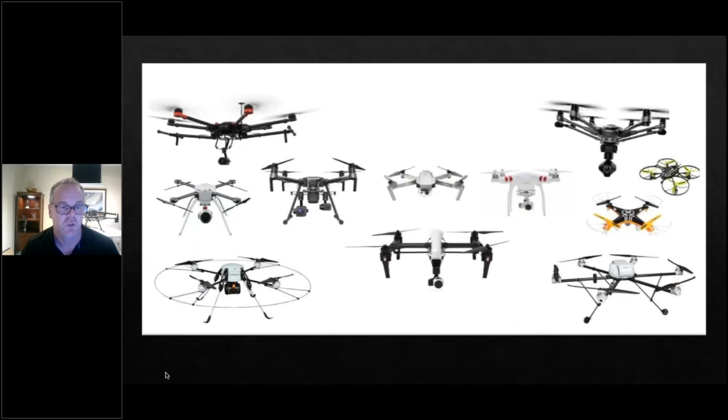So Colin's going to talk a little bit about some of the Transport Canada regulations.

Thanks, Andy. Yeah, before we get into the fun stuff, the equipment, and getting into the fun things we can do with that, I think it's very important for people to understand that Transport Canada plays a big role in what we can do, obviously in Canada. Lots of times people think, well, I can go get this toy for my kids, go to Canadian Tire and buy them a drone and they can fly in the backyard.

Unfortunately, probably back in 2016, 2015, that was the norm. It was pretty much the Wild West out there. Since then, Transport Canada has done a lot of work, a heck of a lot of work actually, to get themselves caught up from the regular traditional aircraft world to bring their minds down to these small little machines that can definitely impact a person if they happen to come in contact with somebody, and also a traditional aircraft should you happen to have a collision with an aircraft. So over the last few years, they've been developing a regulatory structure, which is still again in development, but now there is a set of rules that people have to abide by when they go and get a drone from Canadian Tire, from Best Buy, or whichever.

So just so people are aware, anything over 250 grams in Canada is a regulated piece of equipment. So you can have either one of two licenses from Transport Canada, a basic or an advanced operator certificate, and that gives you certain capabilities in different kinds of airspace you can go and fly your drone.

The other important thing to note is that Transport Canada really recognizes the fact that first responders have a need. Probably, I guess it's very easy to separate that need from your commercial operator from your consumer operator, and they really recognize that from the very beginning. So they've been working directly with some first responder agencies just to determine exactly what those capabilities are and give us the ability to basically get to a scene, not have to make a bunch of notifications, do a quick site assessment, and launch our equipment. So we have to give them a lot of credit for the work that they've done over the last number of years.

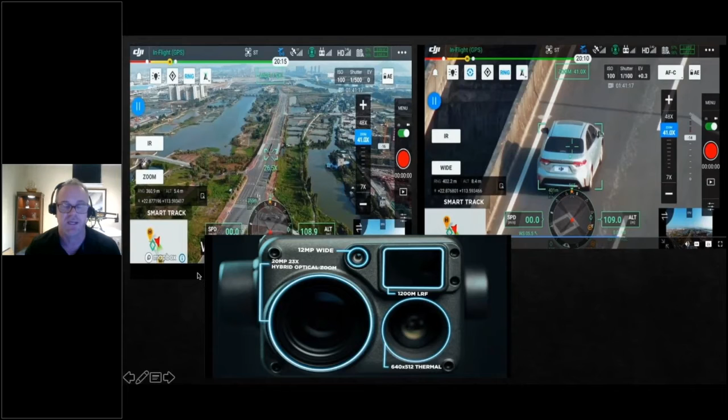So in this example, you see at the top there's a 12 megapixel wide view camera, 23-time optical zoom, which combined with the digital zoom gives you a magnification of close to 200, and then the high-end 640 by 512 thermal. What that lets you do is, in this case, the picture on the left would be the wide angle view, which gives you a good situational awareness overview. A quick push of the button, and you're on the zoom.

The other advantage these systems have now is target tracking. Push of a button, and you indicate the target you want to follow, and it'll follow that target. That technology's been around for a few years, but it wasn't always that good. Like a lot of things, the systems learn, the demand is there, and these systems are really good now. We did some tests where I went behind a building and the camera would follow me. Older systems, it would lose you. Now it's almost like it waits and anticipates that I'm going to come out on the other side, and it'll pick up that target again.

So much improved. Other things it has are the laser rangefinder. You can see here from the system to the target is 402 meters, and it'll also give you a lat and long position.

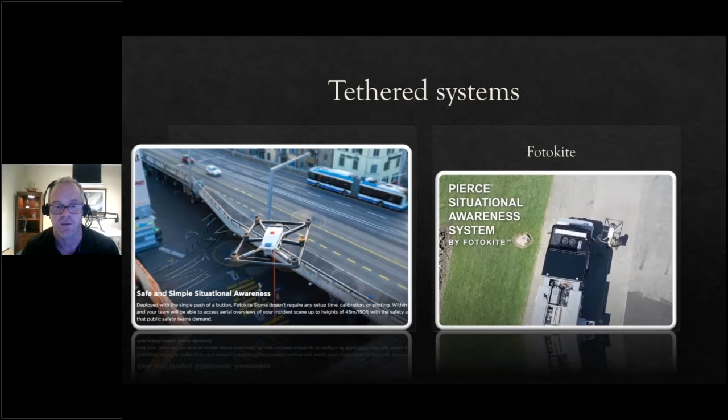Just another example of the tethered system. It's portable—you can carry it in a rolling case or mount it on a vehicle. In this case, it's mounted on top of a fire truck. It could be a command post. That gives you an idea of how this technology is progressing.

So, watching our time here, we're going to talk about standardized training. One of the big challenges of standardized training is, number one, to have a program that's recognized.

In my previous world, we started working with this group a few years ago on the bomb side, bomb robots. ASTM is a widely recognized global standard in a lot of things, not just robotics—it's a standard for a wide range. NIST is a division of the US Department of Commerce, and they're the group we started working with. They've developed a methodology that we're looking at to adopt in the robotic field.

So the purpose of the project, covering ground, air, and water, is basically to develop a way to evaluate not just the systems themselves—because there's so many with different capabilities—but also to evaluate the pilots, the operators, and to be able to collect that information and use it effectively.

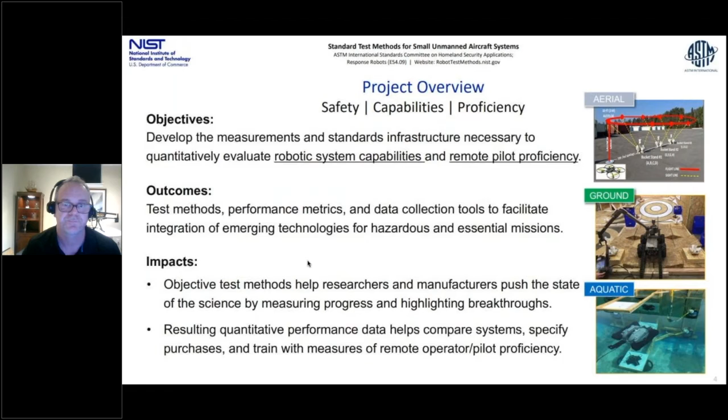You have to be able to measure capabilities. There's an enormous range of robots and capabilities out there, so you have to know a department's not going to be able to buy one drone that does everything. It might be too small for certain applications, or too big—you can't take the M300 and fly it through a house. It's just not going to work. So you have to understand what you're doing.

Inspire innovation. If there's something you need and you need to communicate it to a manufacturer or a representative, you can use these tests to explain what it is you need. A guide to purchasing and deployment.

There's lots of examples out there—I know in my department and others of equipment that was purchased and never used because it didn't ultimately fit the role it was designed or purchased for. So you want to be able to make a purchase knowing what you need it for. If you're shopping for a car and need to carry a lot of stuff, you're probably not going to buy a four-door sedan—you want something suitable, like a pickup truck or a van. So this gives the purchaser that information.

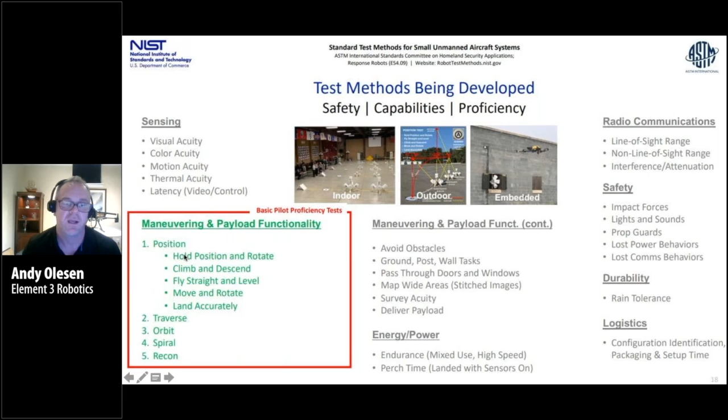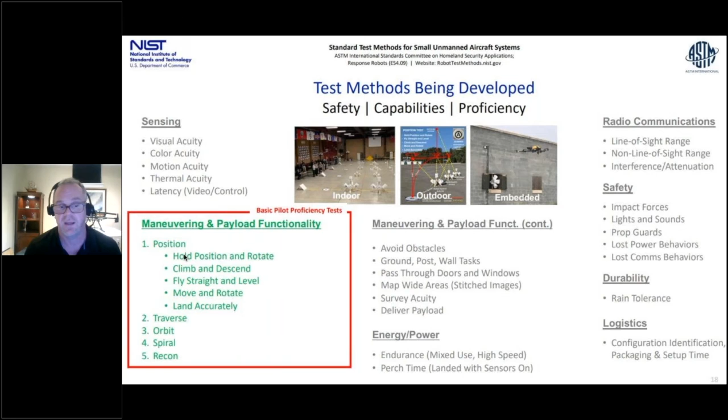The red box is basically what was identified as the basic core skills—what an operator needs at a basic level to ensure they're competent. That would be just the basic flight maneuvers: being able to hold a position and rotate the system, climbing and descending, flying straight and level, moving and rotating, and landing accurately. Those are the core ones.

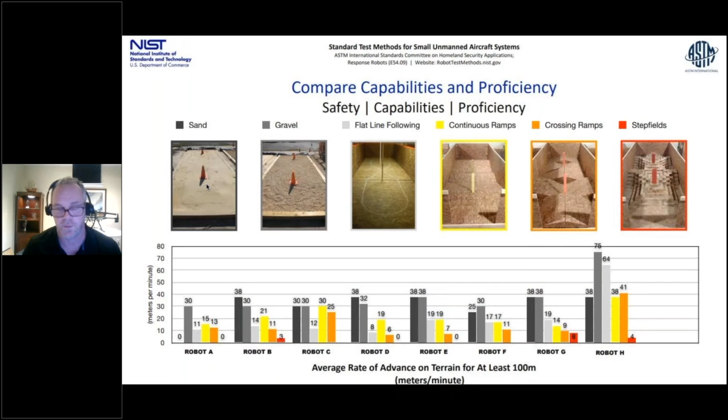That's a specific system and how it did on a specific standard test. If you needed a ground robot really good in sand, you probably wouldn't go with robot A because it didn't do well. At least it gives you that information. Robot H on the far side did pretty well in sand, and those metrics and indicators are there for each test. This applies equally for aerial systems. All the aerial systems designed have certain applications, and it allows the operator or purchaser to make an informed decision.

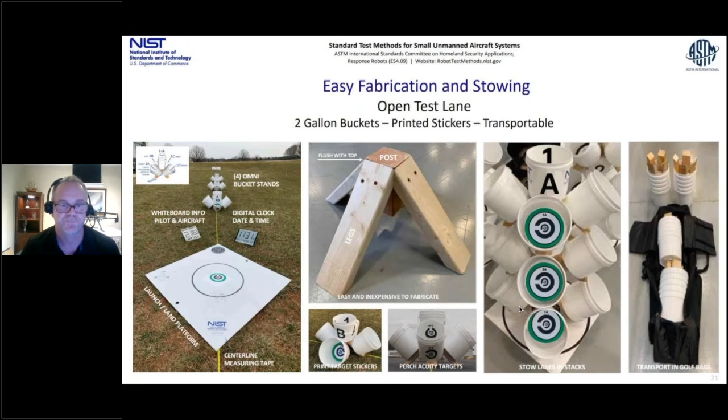The stickers have two basic functions. Down at the bottom, they're put in buckets so the operator has to be in a certain position. If you're too far left or right or up and down, you're not going to see the target, so it focuses on the task at hand. The operator would fly the drone over a bucket, and their purpose would be to see that green circle. If they see an entire green circle, they're in the right position. If they don't, they wouldn't get the point or the mark.

On the right is the payload functionality, designed to test the camera abilities. Some smaller systems have great cameras, but you need to know how close you're going to get. These are called the Landolt, the concentric Cs, Landolt test method. What the operator looks for is where the gap in the C is. On the large one, which most systems can see relatively easy, the gap would be on the left. The next one in would be bottom left, and there are actually five circles in there.

How this translates to emergency services is, if you were a police operator looking for a license plate, the second ring in there, if you can see that, then you can see a license plate, which on a lot of smaller systems means you're probably about 10 to 15 feet away. On the smaller system, if you're 30 feet away, you're probably not going to be able to read a license plate, so you know you have to get in closer. If you have a big zoom camera, you could probably be 400 or 500 meters away, because you have the zoom you can see the camera. So it gives you an idea of the capabilities, strengths and weaknesses of your system.

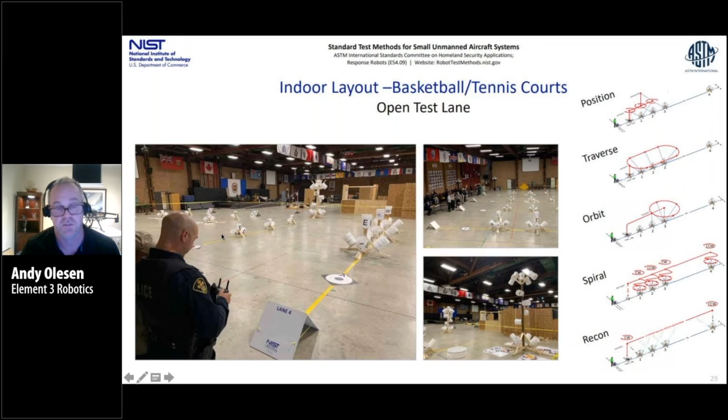These were some tests we did at the Ontario Police College a year ago. We ran those basic lanes, five of them I think, and ran the operators through it. The examples in the back are the ground, the bomb robot test, that wasn't part of the aerials. But this gives you an idea of five lanes in a relatively small area.

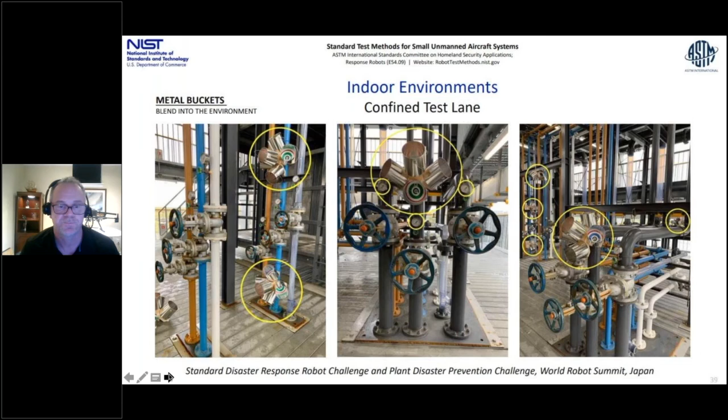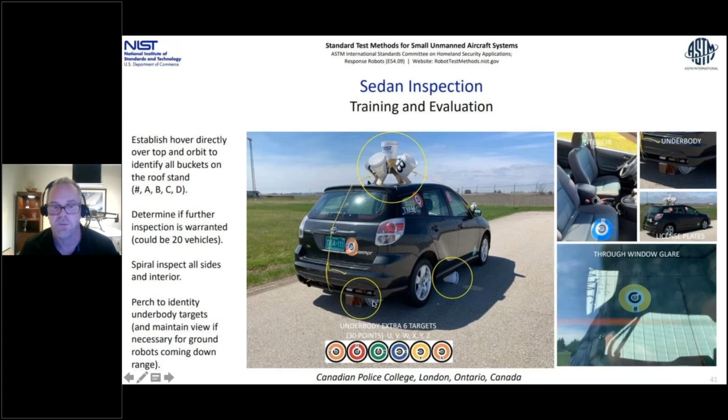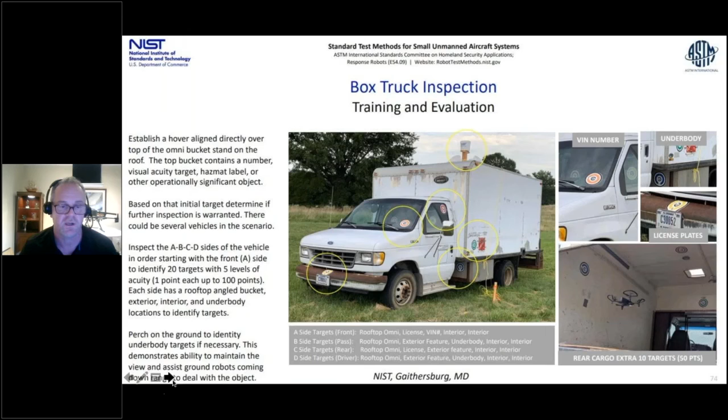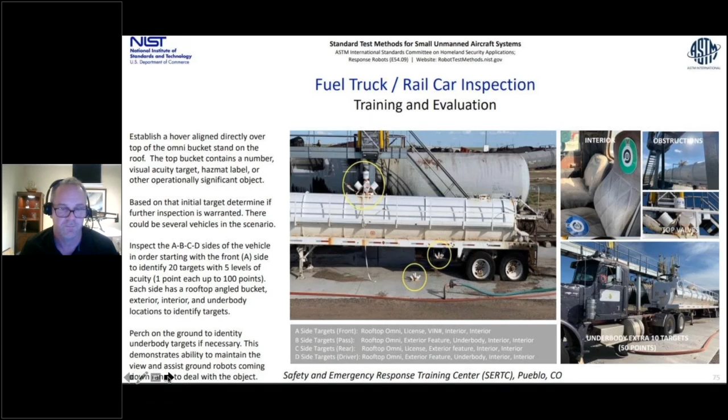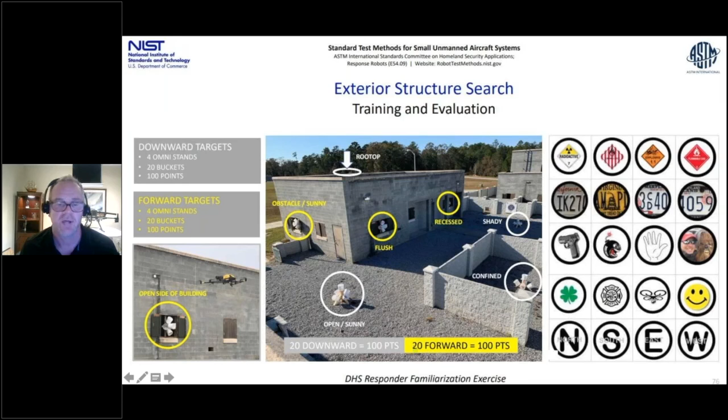Any kind of standardized testing has to be varied enough to apply in different situations. These kind of test methods are primarily used in the daytime. For night operations, you can either illuminate the same targets by external lights. You can put headlamps in them to light them up, or leave them dark.

BVLOS is beyond visual line of sight. Right now, everything has to be done where you have to be able to see the system, and you have to stay under 400 feet. If an emergency service operator flies behind a building that's just a few feet away and loses sight, technically that's against the rules. Transport Canada knows that's an issue. Those rules are probably going to change, but how do you evaluate the systems that can do that? How do you train the operators to be able to do that in a standardized fashion? And that's how we see this being a benefit.

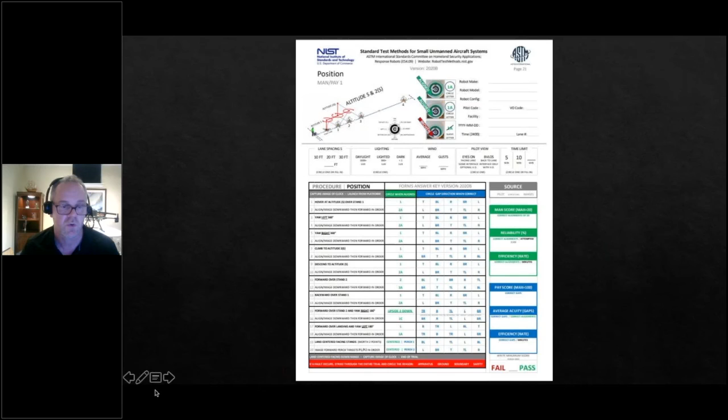This is my last slide, and I'll turn it over to Colin again quick.

Most of the police operators are part-time, they do other jobs and then they do their bomb job, so they don't get as much time. So you'd think that without enough time, their scores would be a little bit less.

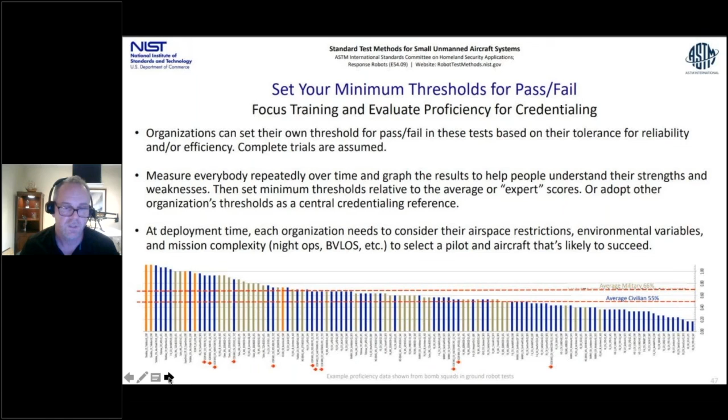So I'm going to turn it over to Colin to talk about the new SARA Association. Thanks, Andy. This will be our last slide, everybody, just so you know.

Just briefly want to touch on this new Canadian First Responders Robotics Association. As I mentioned earlier, one of the things we run into is a lack of standardization, nationally and internationally, but we're going to cover Canada. So we developed this new association to work in concert with the regulators and with a number of agencies in Canada to develop a standard. Based on these NIST standards that Andy just talked about, we'll have recommendations come out from the association for people operating in the drone space, so that we're all on the same page essentially. There'll be certain benefits for operators once they get the training, they get up to speed, and they'll realize that by operating in concert, we're all moving the industry further together, as opposed to all doing a number of different siloed attempts at developing our drone program.

So I want to thank everybody for their time and their patience. That's all we have for today. I'll turn it back over to Renee.

Wonderful. Thank you guys so much. Wow, even just from last summer's event that I attended, that you guys hosted at Mohawk College, there's been some changes. So I certainly learned something new. A crazy comparison between the bomb robots and the UAVs and how quickly that technology is evolving there. So thank you both, Colin and Andy, for sharing that.